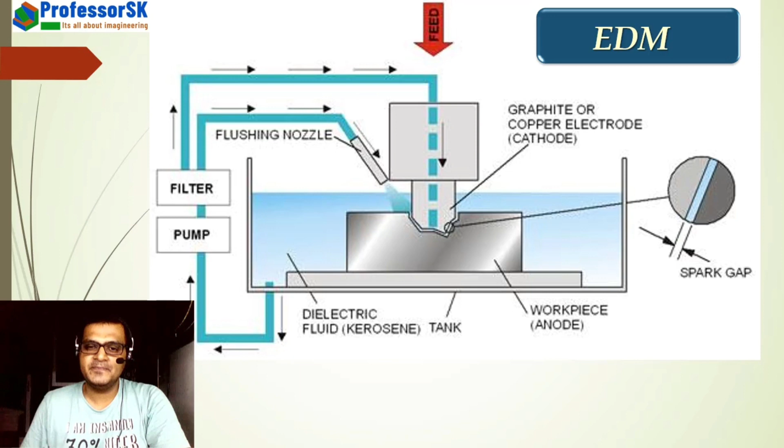So basically EDM works on the principle that heat energy generated by the spark is used to remove the material from the workpiece. So in this process the spark is developed, and due to that spark heat is developed, and due to that heat the workpiece melts. So let us see how the setup is. You can see the complete constructional setup of the EDM process.

This part is known as tool and this is workpiece. As you can see over here, that tool is actually the mirror image of the workpiece. Also, the tool and the workpiece are connected to a power source. Tool is always a cathode and workpiece is always an anode. Also, the complete setup of the workpiece and tool is submerged inside a liquid. That liquid is called as dielectric fluid. Dielectric fluid can be different like kerosene, paraffin oil, transformer oil, etc.

At the bottom there is a filter arrangement provided because fine droplets of metals that are machined from the workpiece are inside this dielectric fluid. So this needs to get filtered. So there is a pump and filter arrangement provided, and the filter output is again going through a nozzle which is directly falling on the working area. This area is called as working area.

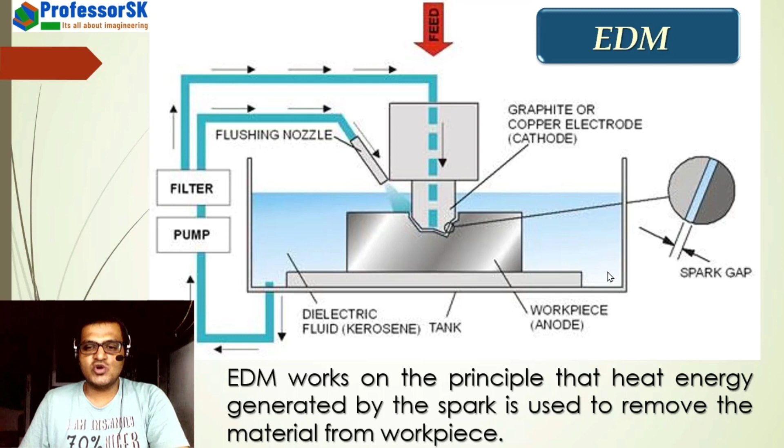As you can see, there is no contact between the tool and the workpiece. So this is the main advantage of non-traditional machining processes, that tool and workpiece do not touch each other. You can see that there is gap. Now this gap is actually required for producing the spark. So let us see how this non-traditional machining works. I'll show you a few videos, just have a look.

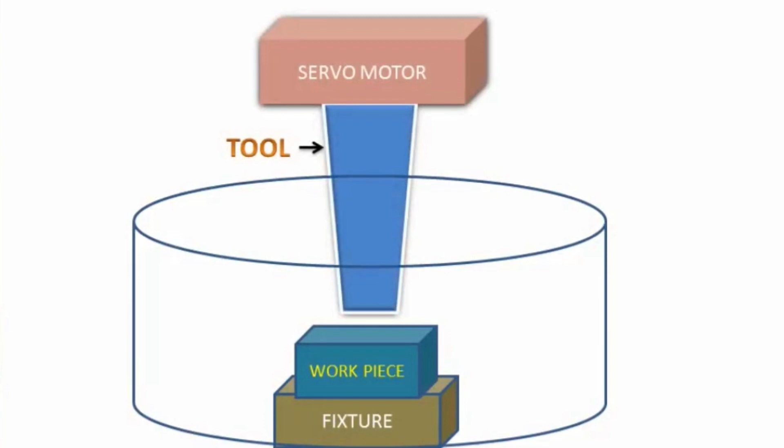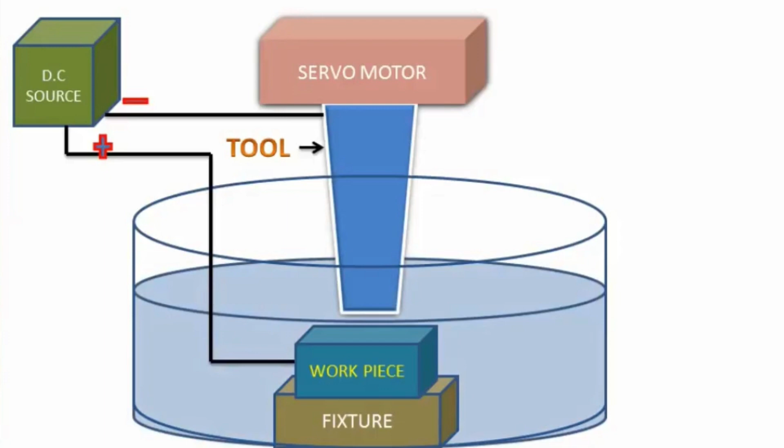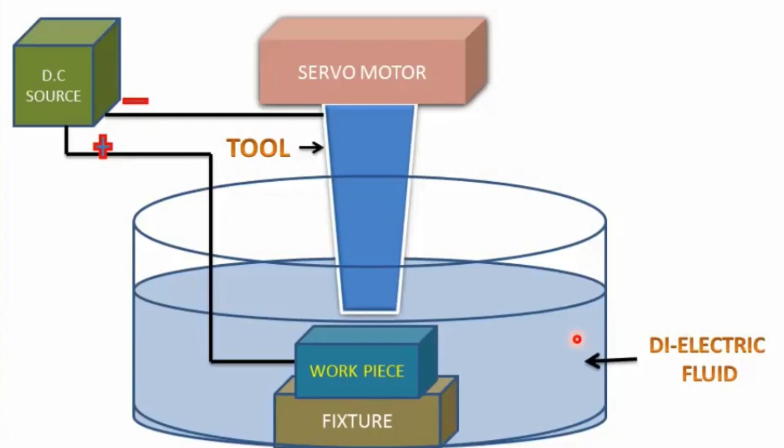Dielectric fluid has a property. It will act as an insulator between tool and the workpiece, and also on the high voltage this dielectric fluid will be ionized in the form of ions, which will help in the spark which will come between the tool and workpiece. Now we will see the process how EDM will work.

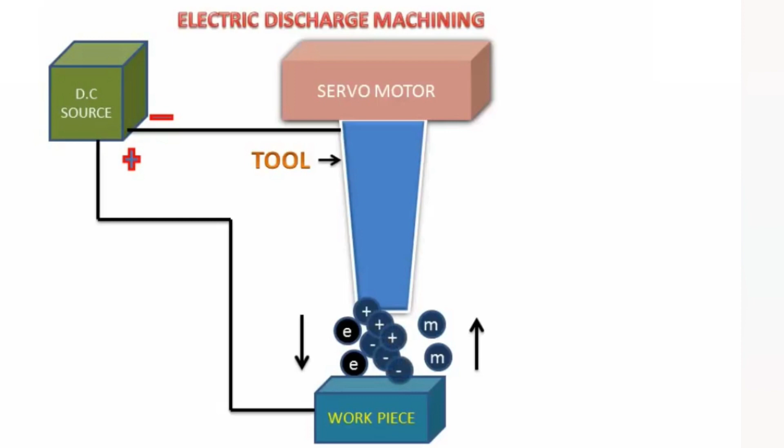Workpiece and tool is connected to the DC power supply, positive and negative polarity. Then workpiece is struck by the electrons because tool will liberate electrons with a very high velocity, and workpiece liberates the metal ions which will go towards the tool. But in between these a dielectric fluid is also there which will be ionized, and it will break down into positive and negative ions.

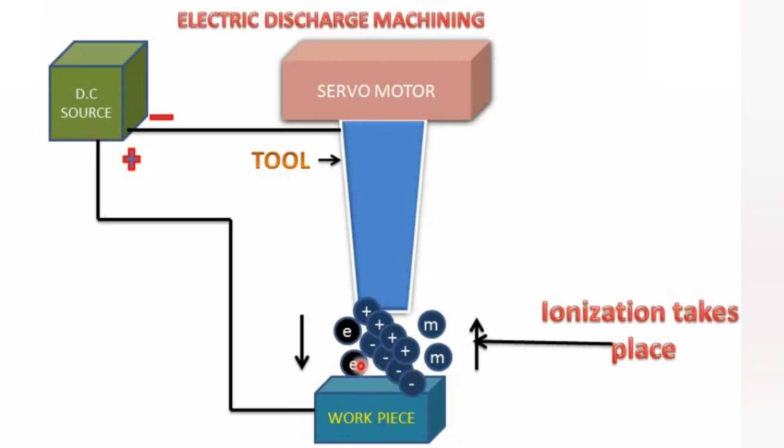Now what will happen? Electrons and these negative ions will combine together and make an envelope between tool and the workpiece and create a spark. This will create a spark between tool and the workpiece. This spark will generate about 8000 to 12,000 degrees Celsius heat, which will melt the workpiece and remove the metal from the workpiece. So this is the process of electric discharge machining.

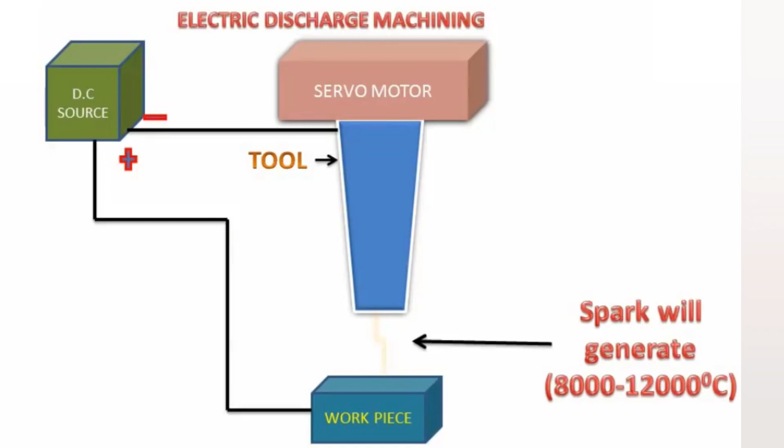Okay, so as you have seen in the video, there is a tool and workpiece and the complete setup is submerged into dielectric fluid. Now how does this work? As you have seen, tool is connected to the negative terminal and workpiece is connected to a positive terminal, and the complete setup is submerged inside the dielectric fluid. We all know that electricity travels from positive to negative, but electrons travel from negative to positive.

So there is no contact between anode and cathode, so the circuit is not yet completed. So what will happen? The electrons will travel from negative to positive. Once the power source is turned on, all the electrons will come and get deposited at the cathode tool tip. So these electrons are now very much excited, and these will try to jump off from the cathode and go to the positive charge.

Now what is the positive charge over here? Yes, the workpiece is the positive charge. So electrons will jump from cathode and they will go to anode, but there is a distance, and in that distance there is a liquid.

So electrons have a property that they ionize the medium through which they pass. So this liquid medium will be ionized. Ionization means splitting up of cations and anions. So the dielectric medium will be split into cations and anions. So now in this area between the workpiece and the tool, there are cations, there are anions, there are

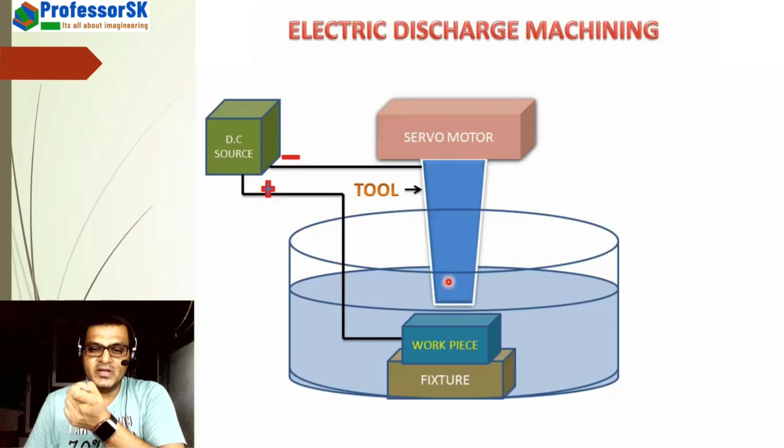So again at the next spark the melting takes place, and when the spark is gone the dielectric liquid will come and clean the workpiece. So this dielectric medium will be filled with droplets of the workpiece, and as we have seen in the setup, there is a filter connection provided which will filter the dielectric liquid. So this is how EDM machining works. Let's see the next video.

As erosion continues, the machine controls advance the electrode through the work, always maintaining a constant gap distance between it and the workpiece. To understand how EDM removes metal, let's examine a single spark in the erosion process. As a pulse of DC electricity reaches the electrode and part, an intense electrical field develops in the gap. Microscopic contaminants suspended in the dielectric fluid are attracted by the field and concentrate at the field's strongest point. These contaminants build a high conductivity bridge across the gap.

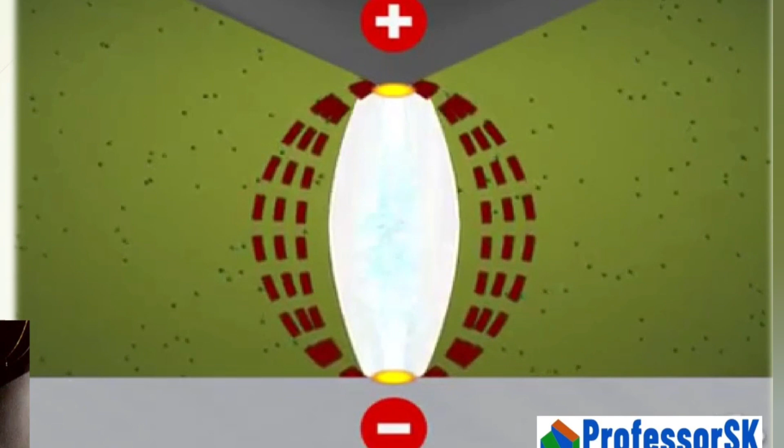As the field's voltage increases, the material in the conductive bridge heats up. Some pieces ionize to form a spark channel between the electrode and the workpiece. At this point, both the temperature and pressure in the channel rapidly increase, generating a spark. A small amount of material melts and vaporizes from the electrode and workpiece at the points of spark contact. A bubble composed of the gaseous byproducts of vaporization rapidly expands outward from the spark channel.

Once the pulse ends, the spark and heating action stop, collapsing the spark channel. Dielectric fluid rushes into the gap, flushing molten material from both surfaces. This EDM residue consists of small solidified balls of material and gas bubbles. So this is how the EDM process works.

Let us see what the process parameters of EDM are. The very first thing is the tool. The electrode usually acts as the cathode and is immersed in a dielectric fluid. As I have told you, the tool is always the cathode. Next, a DC voltage of approximately 300 volts is applied in modulated pulses of 200 to 500 kilohertz. Dielectric breakdown causes sparking at around 10,000 degrees Celsius when the gap is small. The spark erodes the workpiece in the shape of the tool.

I said at the start that the tool is the mirror image of the desired workpiece we want, and as the material is removed, the tool is progressively lowered as the workpiece erodes. Material removal rate is typically 300 mm³ per minute, and tool wear ratio is 3:1 with metallic electrodes, and 3:1 to 100:1 with graphite electrodes. Now let us see the process of EDM.

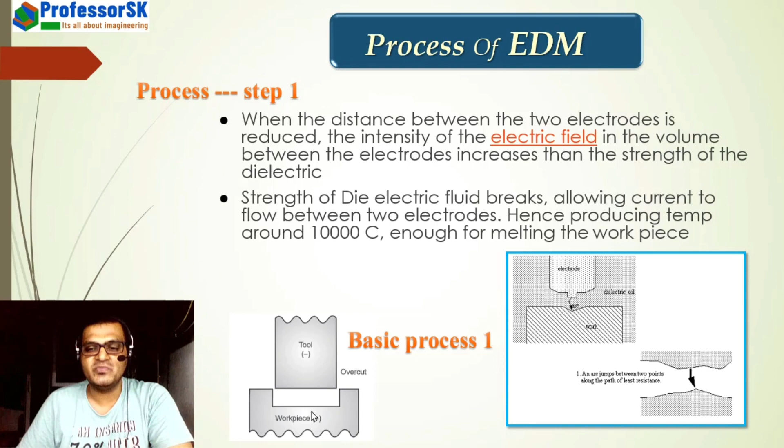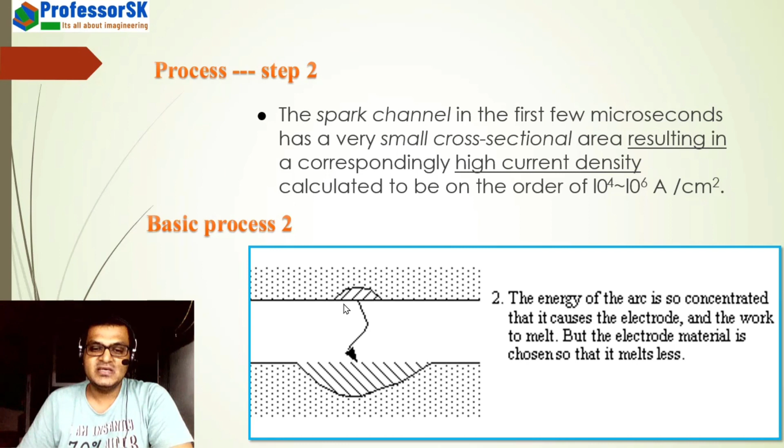Now in this case, as the temperature has reached up to 10,000 degrees Celsius, at this temperature the material directly vaporizes, but there are chances that the tool also gets corroded. So that is why the corrosion rate is also more in this process.

Process step 3. Because of these extreme densities, the temperature in the channel is very high, resulting in the melting and vaporization of a small amount of material from the surfaces of both electrode and the workpiece at the points of spark contact. A rapidly expanding bubble is created in the dielectric fluid around the spark channel.

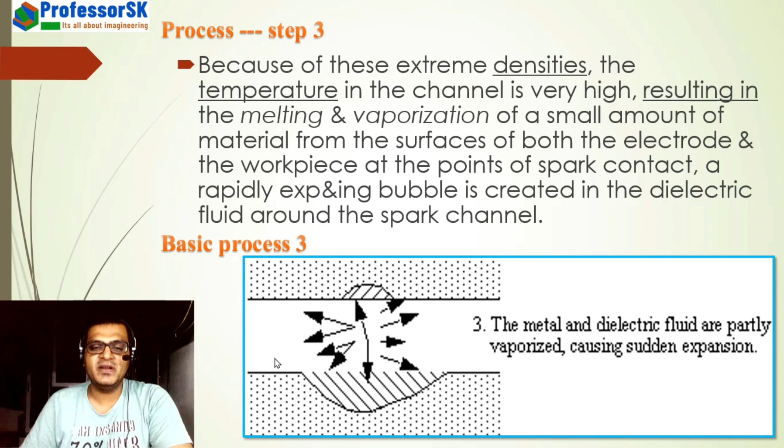See, in this process, the metal and the dielectric fluid are partly vaporized, causing sudden expansion. There is a sudden expansion, the bubble is created, and when the spark is gone, the bubble breaks and the dielectric fluid rapidly rushes into the working area, causing all the droplets of metal to flush off.

Process step 4. When the electrical pulse is terminated, both the spark channel and the vapor bubble collapse. The violent inrush of cool dielectric fluid results in an explosive expulsion of molten metal from both the electrode and workpiece surfaces, resulting in the formation of a small crater in the surfaces of the two conductors, solidifying hollow balls of metal which are removed from the gap by the fluid.

In this, the dielectric fluid also acts as a cleaning agent of the working area. The blast from the expanding vapors knocks some molten particles loose and the remaining molten metal hardens.

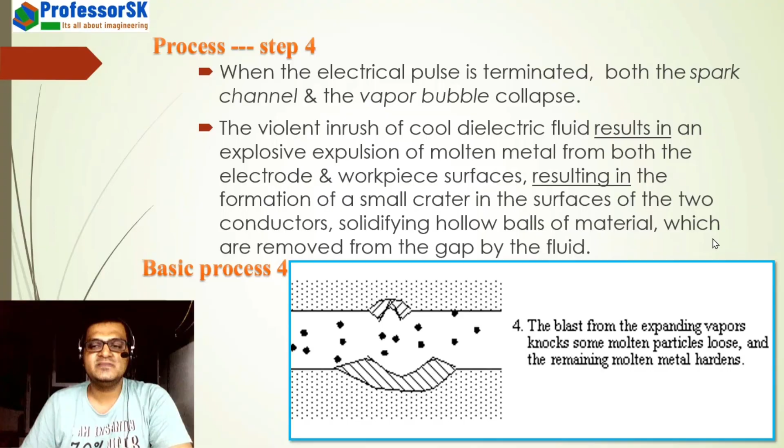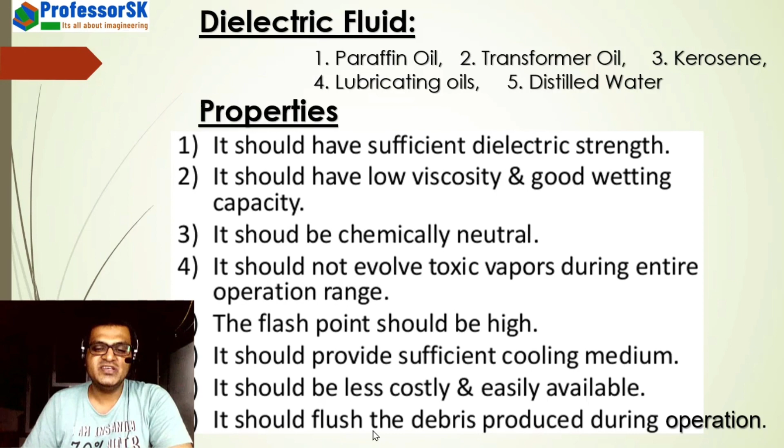It should be less costly and easily available. It should flush the debris produced during operation. Like I have said, it is producing the flash wave which flushes the debris from the working area.

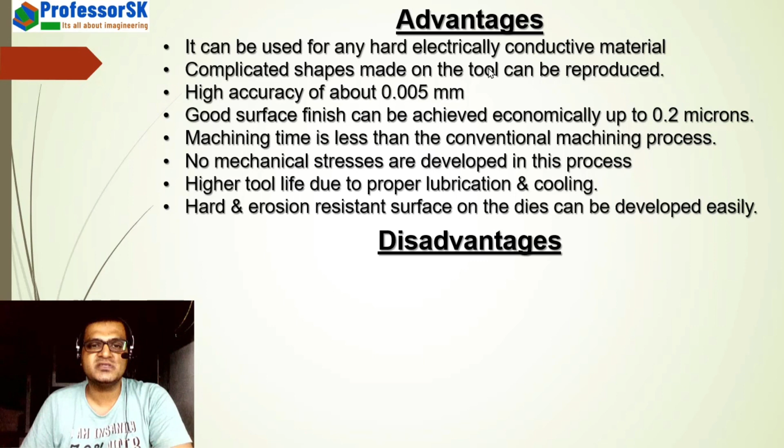Now let us see the advantages and disadvantages. Advantages: number one, it can be used for any hard electrically conductive material. Any electrically conductive material can be machined by this process. Complicated shapes made on the tool can be reproduced. High accuracy of about 0.005 mm can be achieved. Good surface finish can be achieved economically, up to 0.2 microns.

Machining time is less than the conventional machining process. No mechanical stresses are developed in this process. Why are no mechanical stresses developed? Because there is no contact between tool and workpiece. Higher tool life due to proper lubrication and cooling. Hard and erosion resistant surfaces on the dies can be developed easily.

Now there are also some disadvantages. The very first disadvantage is high power consumption. It consumes very much power for the machining purpose. MRR, the material removal rate, is very low in this. Overcut is formed many times. High heat developed causes change in metallurgical properties of the workpiece.

Surface cracking may take place in some materials, because due to this heat the surface becomes very brittle, and because of this brittleness there may be cracks. Taper holes are produced. What do you mean by taper holes? Taper holes mean holes like this shape.

Unable to machine electrically non-conductive materials. Why? Because we are making the workpiece an anode. So if our workpiece is non-conductive, we cannot machine it. So EDM is not for non-conductive materials.

Next, difficulty in finding an expert machinist, as these machines are very costly and it is also CNC controlled machining. So it is very difficult to get the proper operator for this machine.